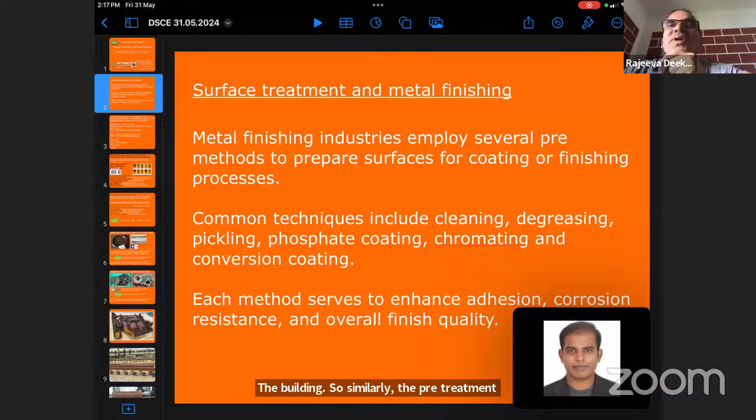It is something like, you have to lay the right foundation to get the right building. If the foundation is bad, we are going to lose the building. So similarly, the pre-treatment takes a very important step. And what is happening world over, that's what I would like to bring to all of your attention.

When we say a cleaner or a degreaser, including household, institution or industry, most of them have one or the other toxic things in it. These are a few things which I have mentioned here. It will be either carcinogenic, which is cancer causing, bioaccumulative, toxic, VOCs. VOC is nothing but volatile organic compounds, which have some emission at room temperature. Any solvent which has an emission at room temperature is considered a VOC.

And ODS is ozone depleting. All of us know ozone, O3, up in the layer is good, which is getting depleted when we use some of the solvents like chlorinated solvents or fluorinated solvents. I will show you one or two examples probably. And corrosive. I am very sure most of you are aware of the conventional acids like hydrochloric acid, phosphoric acid, nitric acid. So many acids we use. Some of the alkalis we use, like sodium hydroxide, potassium hydroxide. All these things are highly corrosive.

And most of the toxic chemical solvents are not biodegradable. They don't degrade so fast. And when we talk about the alcohols, thinners, and hydrocarbons we use for general purpose cleaning, those are all either flammable, toxic, or irritant. These are some of the basic disadvantages we get when we start using some of the chemicals which are used conventionally, not only in India, but worldwide.

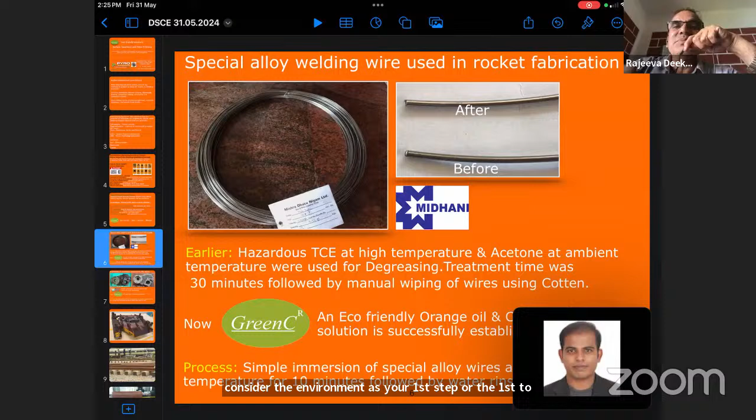When we say cleaning, whether it's degreasing or pickling, the only difference is organic versus inorganic cleaning. Organic cleaning removes oil and grease; inorganic removes scales, oxide scales, or inorganic impurities like silica. Cleaning has to always be 100%—there's nothing like 90% or 99% being good enough. It's never possible that way; it has to be 100% all the time. Even 0.1% grease, oil, or contamination creates a huge problem during working—if not today, then for sure tomorrow.

It can develop into many cracks or corrosion, or the coating may peel off, the paint may come down, and accidents can happen. So the underlying aspect when we talk about cleaning, degreasing, pickling, or any of these things, is that it has to be a 100% cleaned surface. When we say the cleaning is 100%, that means we have removed all corrosive ions completely. Even if one corrosive ion is left behind, it creates a problem, if not tomorrow, based on the environment and the time.

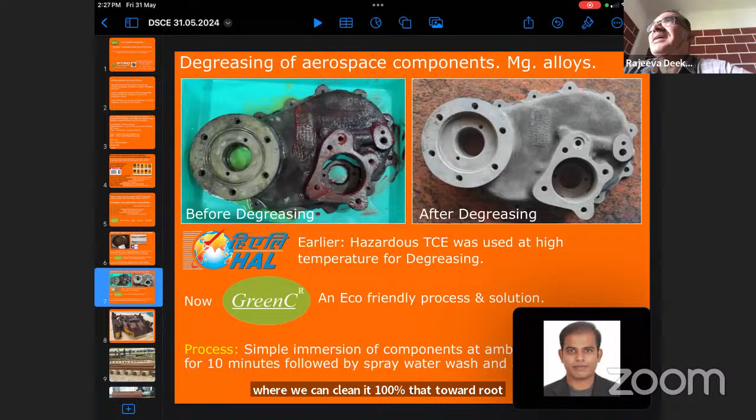And the quality is on par with any of the standards, or sometimes better. Coming to steel, when we talk about steel, there are only two problems in the industry for all of us: one is rust removal, and one is rust prevention.

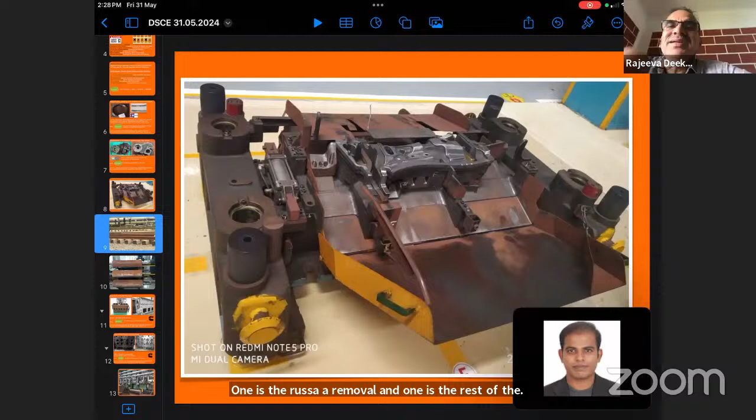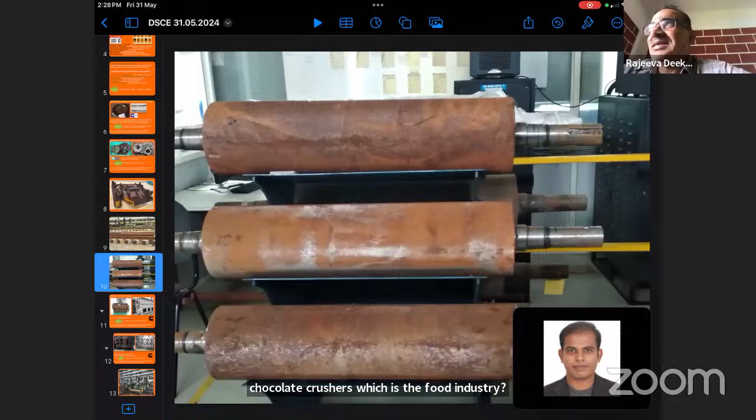So you can see this is a die which is used in the automobile industry. Similarly, this is a railway track. Wherever you see steel, obviously you can see rust. These are all chocolate crushers used in the food industry. If you keep it for more than a day, you can see this type of corrosion.

The corrosion will start immediately, but you can observe it only after a few days, because this color is nothing but Fe2O3, which is a stable state of iron, Fe. So we only see this, but on day one these other states of Fe which are unable to be seen, we feel there is no corrosion at all. But in principle, corrosion will immediately start once the bare steel is exposed to oxygen. Because all of us know the rusting phenomenon: you need the steel, you need moisture for conductivity, and you need oxygen for that electrochemical reaction.

So the corrosion starts immediately; the color you'll observe only after some time, that's all. So it's very important to have a passive surface, or the surface should be substituted with a better coating so that further corrosion will not happen.

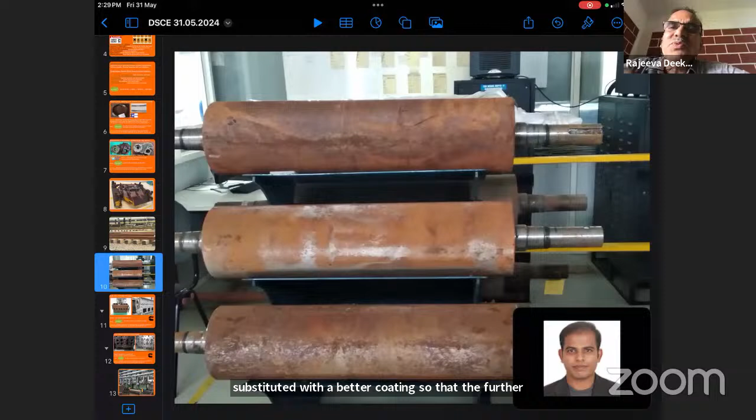So what we have done here: on the left side you can see a component which is totally rusted. As I said, the conventional way is to use some kind of hazardous acid, generally hydrochloric acid, which is quite cheap. Sometimes they use a combination of hydrochloric acid and phosphoric acid to clean it. The problems, as I said, are not only the fumes, the corrosivity, and the dangers for the person using it and for the environment.

Also, the crevices or intricate parts may get worn out. It may etch the surface if left for too long or if the concentration is too high - these are the other issues. So what we have done is developed a citric acid based solution wherein, on the right side, you can see very clearly the surface is spick and span, free from all kinds of corrosion, particularly Fe2O3, and the bare surface is there without further oxidation because we have an additive that prevents flash rusting.

What is that additive? It acts in such a way that the interaction of oxygen will not be there. It acts as a barrier coating and further rusting will not happen at all. Of course, it is only a temporary rust preventive. If you would really like to prevent rust, there are many coatings available, and depending on the requirement, it can be suggested.

For about 2-3 days to a week's time, you can go for the water base. Subsequently, you can think of an oil, or you can even think of a paint, a powder coating, or a plating, something like that.

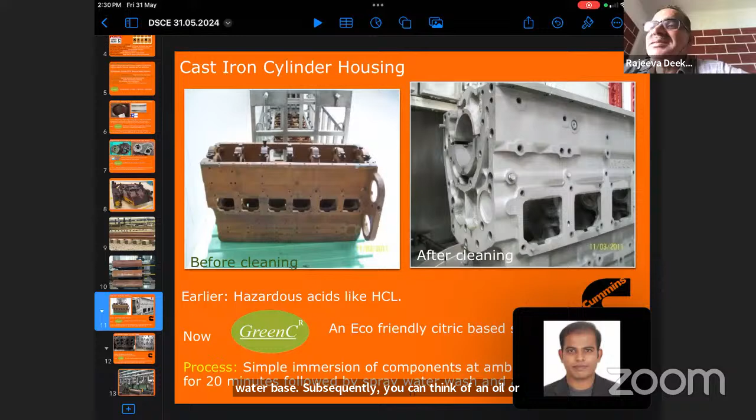So similarly, this we did for Cummins, which is a US-based company, for the remanufacturing industry. This is a diesel engine cylinder housing. When the diesel engine runs for a few lakhs of kilometers, say about 4 lakhs or 6 lakhs, you will have a heavy deposition of carbon, which you can see as that black color in the left photograph. When that kind of thing is there, the deterioration of the efficiency of working comes down drastically, so we need to replace it, remove that, clean it properly, and fit it back again.

So the conventional way, as I said, it is not only in India, even in the US, they use hazardous acids and alkalis to clean this, and they use lots of different brushes, like stainless steel brushes, and keep brushing it. Maybe an automated one may also be available, may not be manual, but still brushing is required there, which I have observed in most countries.

What we developed is a unique cleaner where you just dip it for some time, let's say about 20 or 30 minutes depending on the contamination, remove it, followed by a high pressure water wash. You will get a spick and span surface. You can observe inside the ports are also very clean. So this sort of cleaning is very important for any kind of industry and for any component or surface.

It's not only the metals, even as I said earlier, non-metals also. So these solutions are so eco-friendly and non-toxic and non-hazardous.

This is the only company which is approved by OSHAS. OSHAS is a US-based organization which comes for inspection and certifies a company in terms of the environment, how safe it is, how the working atmosphere is, all these things. So, occupational hazardous category, they will audit and certify. This is the only company which is approved by OSHAS, and this company is getting a Golden Peacock Award.

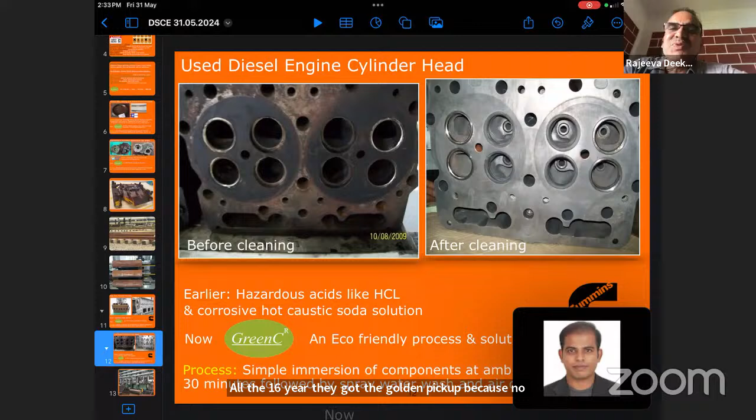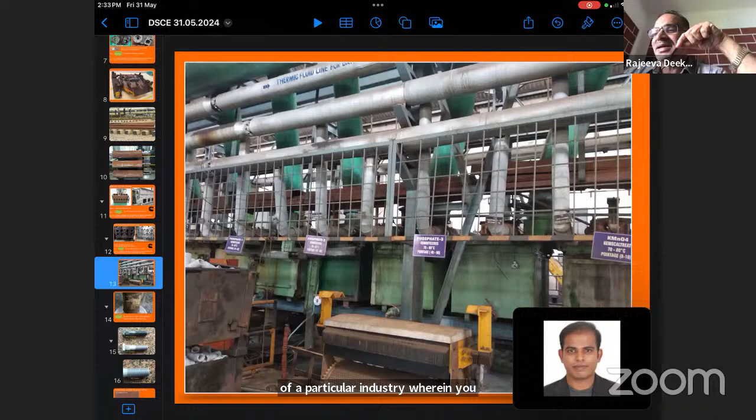Coming to the next slide, here this shows a typical setup of a particular industry wherein you do the painting. Before that, as I said earlier, you need to clean the component, so the tanks, whatever you see, contain various kinds of acids and alkalis. It starts from degreasing where usually they do sodium hydroxide with some phosphates and surfactant, that too at a high temperature. Subsequently it goes for rinsing, phosphate coating, then the painting.

Probably don't worry too much about the steps involved, tomorrow you're going to study that. But most importantly, what you should understand here is you can see so many pipelines attached to each and every tank. This is because they would like to extract the fumes which come out, and this is thrown to all these pipes. You have a big machine which will be working and it sucks all the fumes and releases it into the atmosphere. So only to remove that hazardous fume, they have all these facilities.

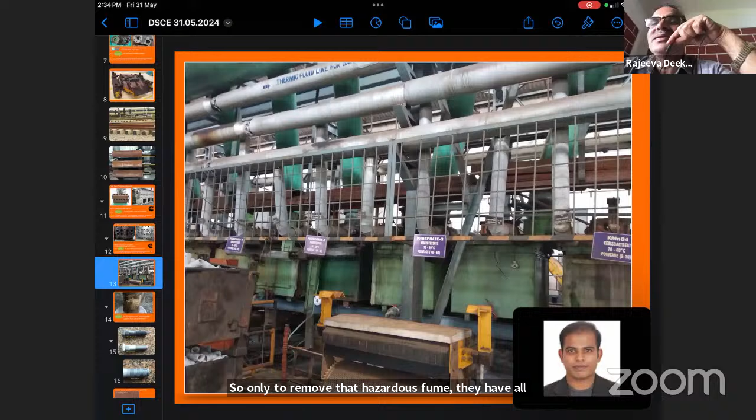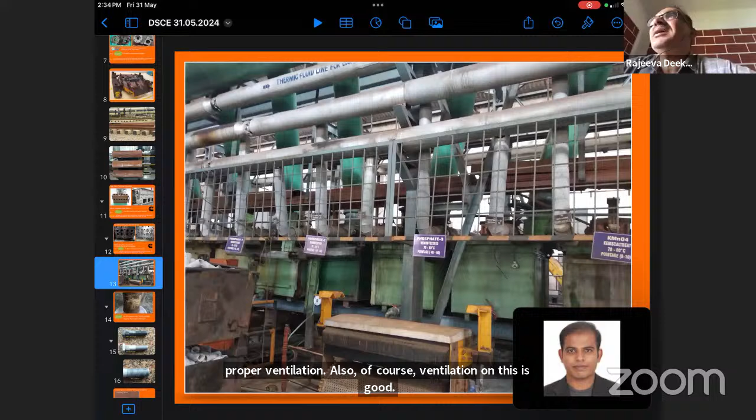Such a big facility and such a waste of energy and time, in my opinion. So what is the change that we have got? You absolutely have no need of all these pipelines or exhaust fans and other things. Even in an AC room, one can work with this without any proper ventilation. Of course, ventilation is always good and is required, because even though it is totally safe and non-toxic, anything other than oxygen and nitrogen added to the atmosphere is not good for the human being.

So what we have done, this is one of the videos which I would like to show you. Hope you are able to see this video.

Here, there is a liner which we are dipping in our eco-friendly solution, which is nothing but a citric acid-based solution. The white thing that you see is hard water scale, nothing but calcium and magnesium scale, majority of them. And of course, you have some kind of rust also.

So when we dip it in the solution, immediately it starts reacting with all the soils and it starts removing that. And when it touches the base metal, it absolutely stops working. That means there is absolutely no reaction on the base metal, unlike hydrochloric acid or nitric acid, which eats away your metal itself if you keep it for a longer time - that threat is avoided. So your substrate, that is your metal or component, is very safe.

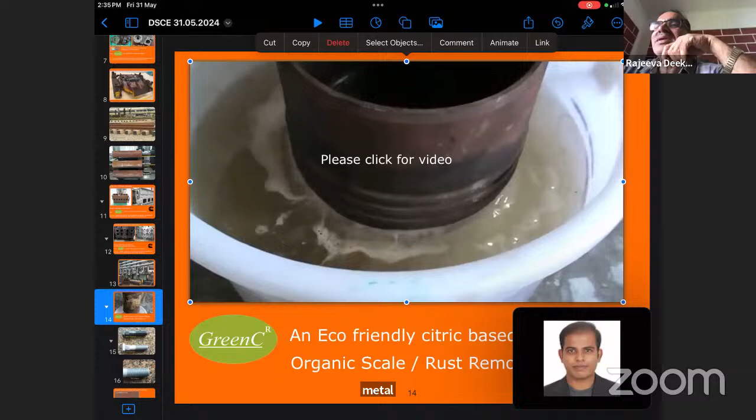Many times it will happen that on Friday somebody will come and dip the component, and the next 2 days are a holiday. Monday when they come, the component itself is not there. It's totally eroded. So those threats are not at all there when you work with this. And the best part is you can just handle it, touch it by hand also.

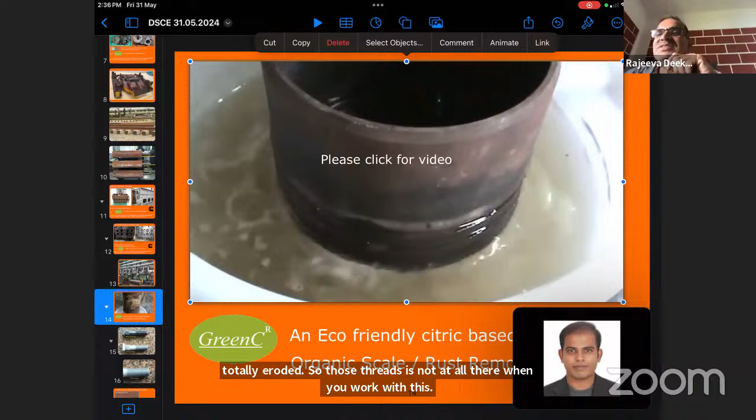It is totally non-corrosive. Of course, we are not recommending that you should not wear any gloves or goggles. Always we suggest it, but in accidental contact, you are very, very safe. That's what it says. And there is absolutely no fume, no smell, and no objectionable odor. And this becomes a very safe practice to clean any kind of component, particularly ferrous metals and alloys.

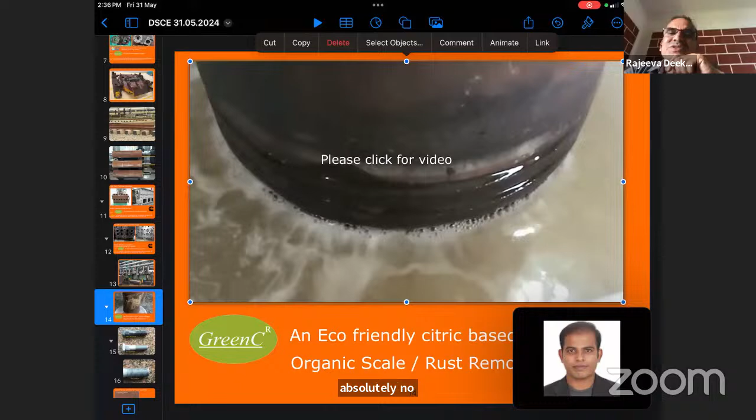Of course, subsequently you can read all these things; they are definitely available when you Google it. I'm just trying to give you something which you may not get when you Google it. That's what I'm concentrating on. Of course, as I said, if you have any questions or any doubts, please stop me.

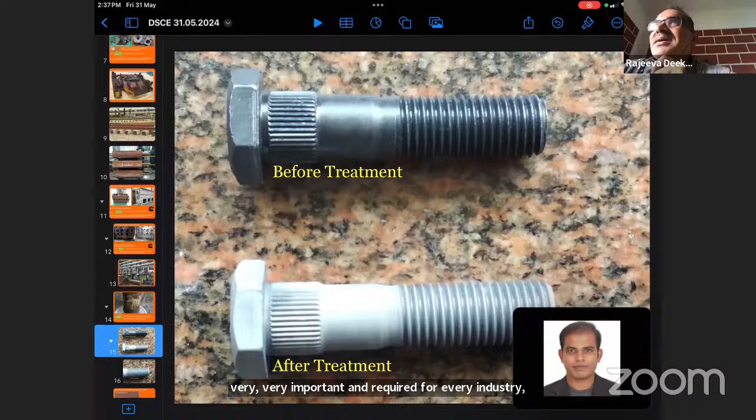Don't hesitate. So the bottom one, you can see it is spick and span clean. Even the threaded surfaces are intact and it is cleaned very well without any erosion. This kind of surface cleaning is very, very important and required for every industry, particularly when you talk about space or aircraft or other industries where cleaning is very, very critical, because even a small speck can create a very big accident.

And this is one more product which we developed. When you have rust, the conventional way is to clean that rust, as I said, using some kind of acid, where we have a safe substitution. We have developed a citric acid based solution. So this particular thing is a slightly different compound, where you apply it on the surface of the rust, it consumes the rust and forms a protective coating. The chemistry is very simple here.

If I can explain a bit on this, the main ingredient is citric acid, and we have a small percentage of phosphoric acid, about 1 to 2%. What happens? This phosphoric acid, all of you know, is H3PO4. It reacts with your Fe2O3. So PO and Fe will combine and form a ferrophosphate layer.

So in that reaction this phosphate layer forms, and this acts as a very good base for subsequent painting or powder coating. It not only removes the rust, it avoids further rusting, and it acts as a very good base for your subsequent plating, coating, or painting.

So creation of this surface is very, very important, particularly for ferrous components when you go for any kind of coating. If you don't do this properly, you may paint it, immediately it looks fantastic, but in less than 3 months or 6 months or a year or two, definitely it comes out like paper and you lose that painting, and again you have to recoat it. So rework is going to be too much.

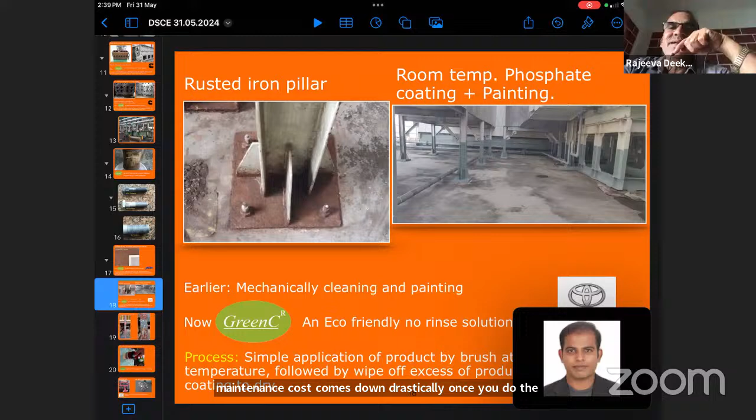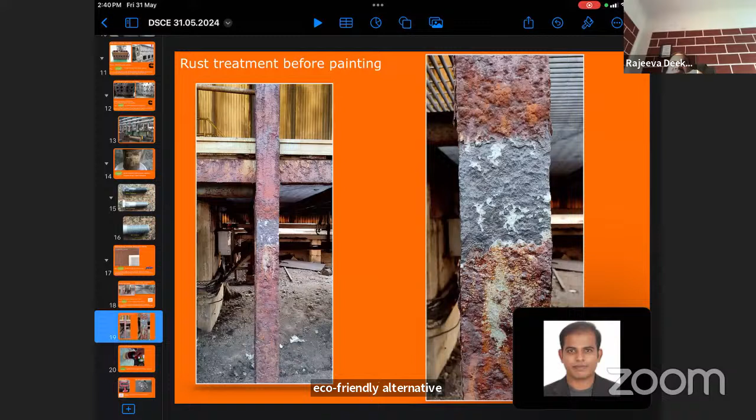Probably, as I said, citric acid alone will not work. Some proprietary additives are there, which is very easy. Once you start, if any one of you are interested, I can definitely guide you to develop all these formulations.

And let me tell you, for the youngsters who are interested in starting their own business, this eco-friendly thing is required, as I said, not only in India, worldwide. And hardly there are people who are working on all these things. So there is a big potential.

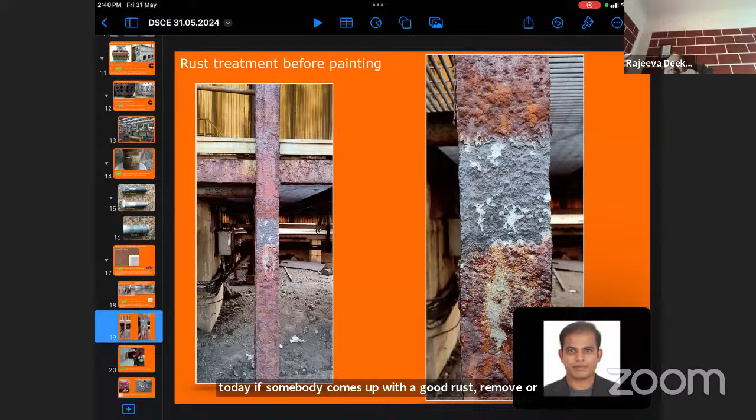Even today, if somebody comes up with a good rust remover or a rust preventive solution, there is a huge market, because every second there are thousands of tons of steel converting into rust because it is not taken care of properly. So there is a huge requirement.

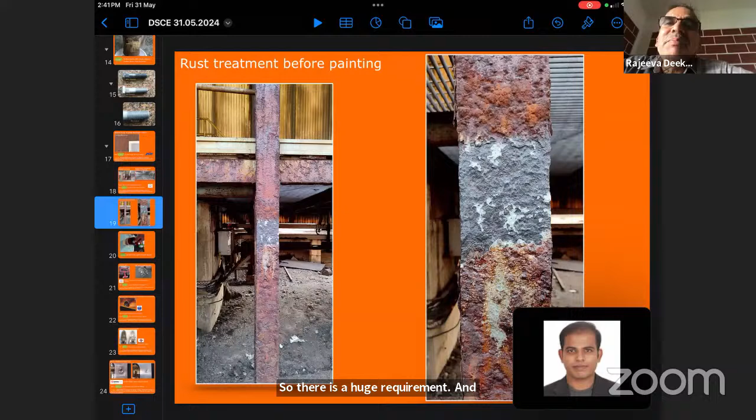And coming to the next important aspect of an industry, the paint remover. In production itself, when you have painted a surface and there is some kind of a scratch, they have to remove the paint and recoat it again. This is one of the requirements. And second, with old components, after using them for a few years, a portion of the paint might have come out, but the rest of the paint you have to remove before the application of the new paint.

The conventional way, probably throughout the world, what they use is methylene chloride and phenol. These two are highly carcinogenic and toxic, and it creates a lot of problems. And there are so many deaths reported, and so many people got cancer because of using these paint removers, not only in India, even in the US also.

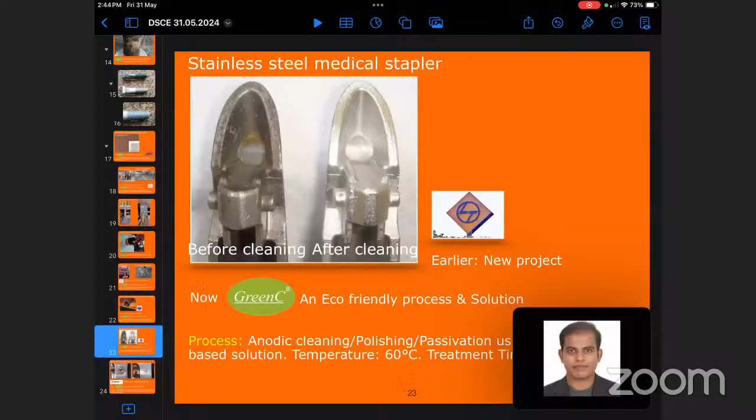And the same thing, we have transferred the technology to L&T also. This is one of the staplers which is used in the medical field. It's not only the aesthetics; the cleaning is very, very important, and the passivation is also equally important.

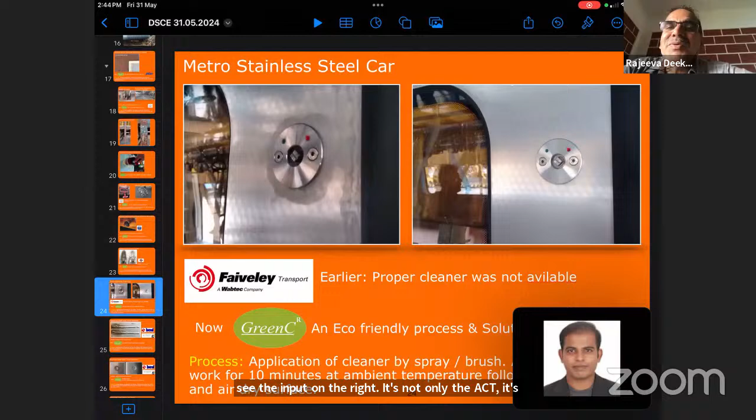And similarly for metro cars, you can see these things. And for BEML and ICF and others, so many people we are supplying. On the left-hand side, you can see this is a stainless steel piece which is welded. When you weld, you will get an oxide scale like this. Because of the high temperature, the chrome oxide which is there will get burnt. So we can call it a depleted chrome oxide, which will not have any corrosion resistance from the atmosphere.

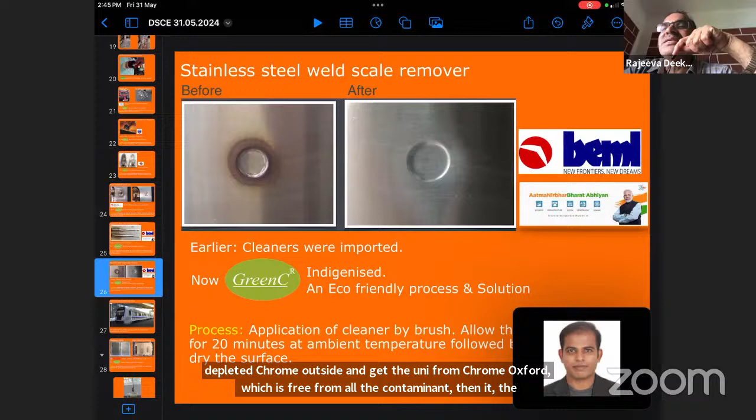There are many problems, oil, grease, and there has to be a particular way to clean this. And we are successfully able to cater to them, right from simple cleaning to a uniform passivation layer. So whether you call it Delhi Metro or Calcutta or Mumbai, most of them are using our solution. And the rest of them were importing earlier. Now they have stopped that also. So this is with respect to stainless steel.

Similarly, when we talk about aluminum, we have two categories in general. One is a low silicon and one is a high silicon alloy. High silicon alloy is always difficult to clean, and again, HF is used there. We are highly successful in developing an HF and nitric acid free process. This we developed for Bosch, Germany itself. It was a very successful project.

And just for your information, high silicon alloy cleaning without HF and nitric acid, hardly anybody has done in the world. And we are very proud that we have come up with a very safe alternative for HF and nitric acid. For about the past 16 years, both Bosch Germany and India have been using it very successfully, and there are absolutely no rejections. They produce about 1.5 to 2 lakh components every day. It's a very prestigious project, and we are very happy and proud of that.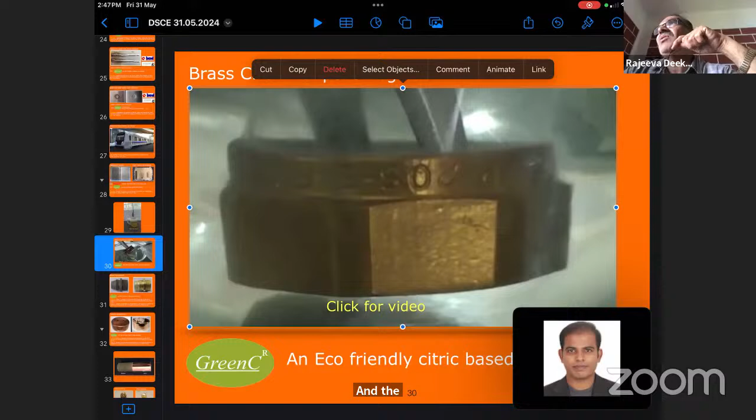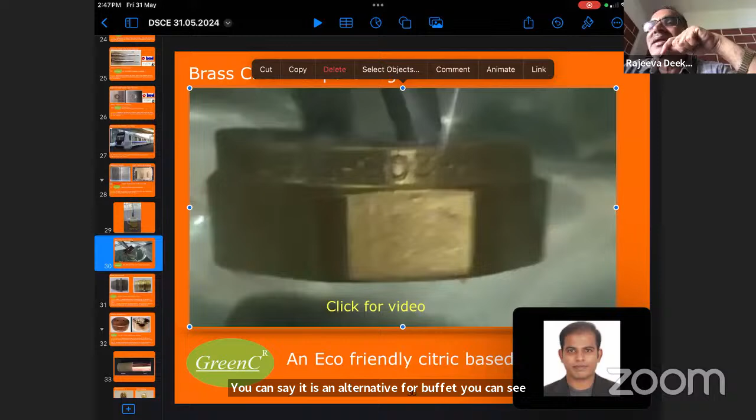In less than 10 seconds, it removes all the tarnished layer, and in another 10 seconds, you will get a beautiful brightness. You can say it is an alternative for buffing. In spite of all the crevices, irrespective of the size and shape, you can clean it and brighten it very well, without creating any problem for the atmosphere or even for the person who is going to do it. You can see it's already got the shiny surface.

And what is the advantage of this? Apart from health, safety, and the environment, you can take care of all the copper-related alloys, like brass, copper, bronze, beryllium copper, so many; highly corroded ones you can clean and recover. On the left side, you can see this highly corroded brass nut. Otherwise, it is thrown away as waste, or it goes for scrap value. By using our solution, you can clean it and brighten it. Even the threaded surfaces are intact, so you can reuse it.

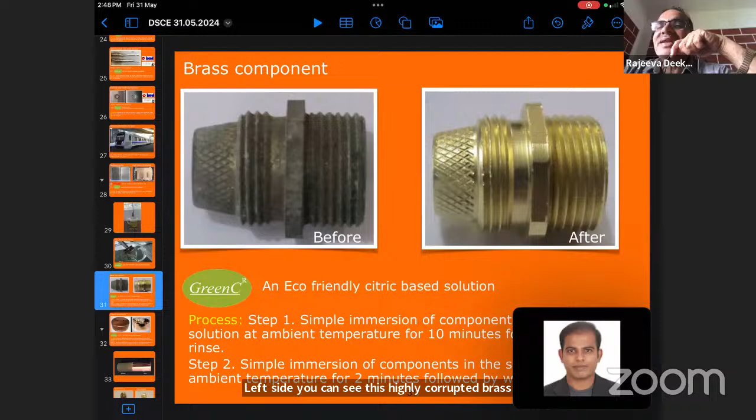And mind you, all these things worldwide, people are just throwing it as a waste. Nobody is using. Of course, some people are trying to use hazardous chemicals. Partially, they are successful in cleaning. But with this case, one can clean it and make it as good as new. That is the beauty of this.